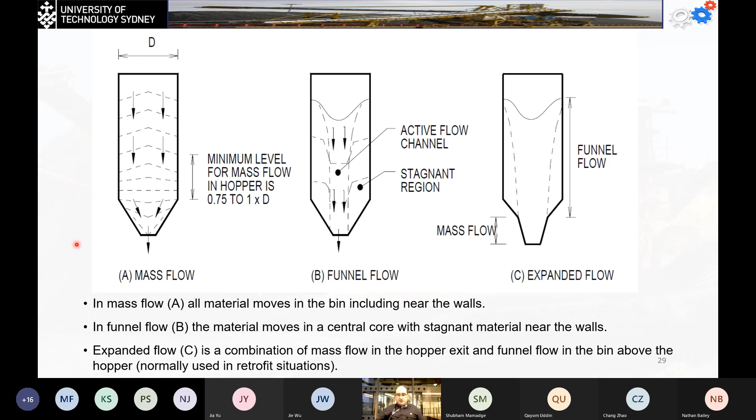The three cases shown more accurately look like this: we're not going to have plug flow with equal velocity. The materials move along the walls, and in funnel flow, the active movement is just in the center, and this causes what we call a rat hole.

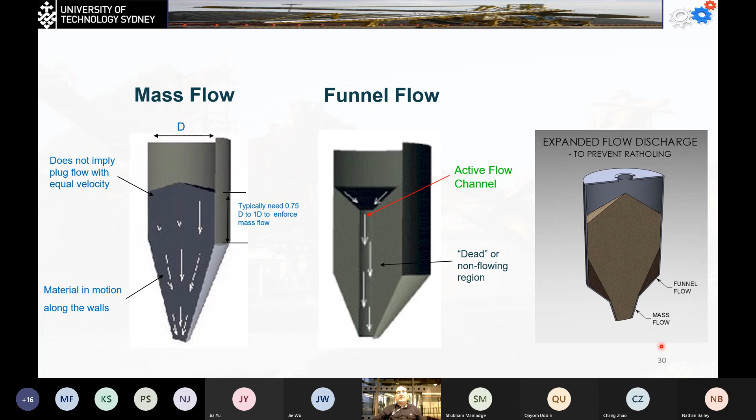We have non-flowing material on the sides; this can be due to build-up of material or high friction with the wall, making it static. Similarly, in expanded flow, the third flow, material on the sides doesn't move while in the center the material moves. This also causes many problems for your system.

Now, if you're going to work in a storage facility and they bring you coal, the first thing you'll do—you'll learn this by starting the work there—is go take samples, bring these samples to the lab, and start doing the tests for them.

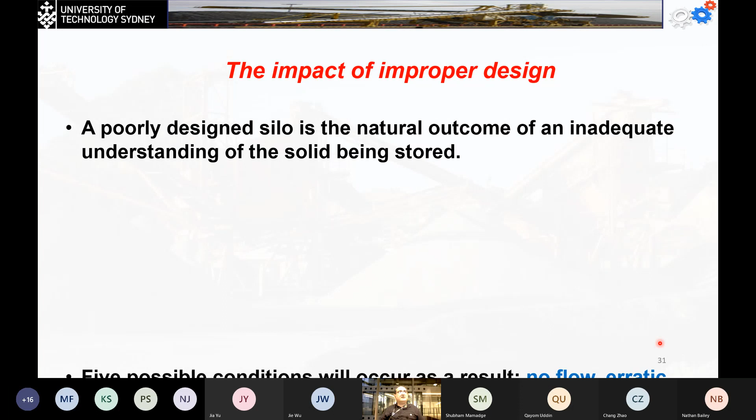You're going to have your own value for the delta and delta wall and do your calculation, and you're going to do that on the next day, third day, and the fourth day, until you have the appropriate cases for the materials, and you will know when you have to remove the materials from the silo. So 5 possible conditions can occur: no flow, erratic flow, flooding, counter current flow, and segregation as possible conditions from bad design.

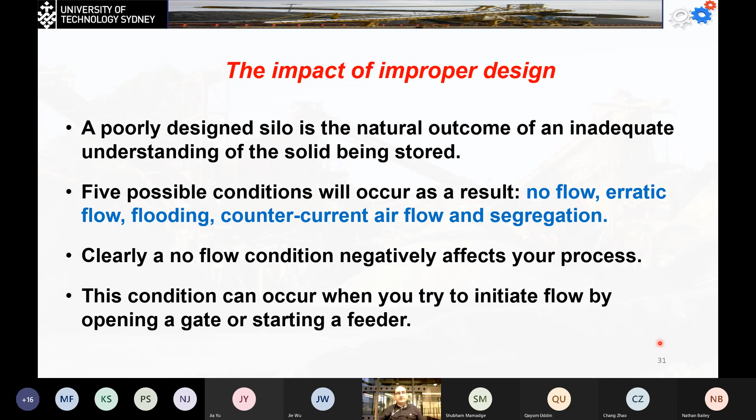Clearly, a no flow condition negatively affects your process. We're not going to have the correct amount of materials to feed the process. This condition can occur only when you try to initiate the flow by opening gates or starting the feeder. We said that the wrong flow can cause a problem.

Remember that this system, though built of stainless steel, the structure is always going to be weak. This system has been designed to take pressure from the inside, but it should be even. If this pressure is uneven, it's going to collapse very easily.

It's something like, if you fill a water bottle with pressurized water, it's going to hold the water inside. But if you have the water freeze inside the freezer, it's not going to expand equally. It's going to expand from one side more than the other, and this will cause the bottle to break immediately.

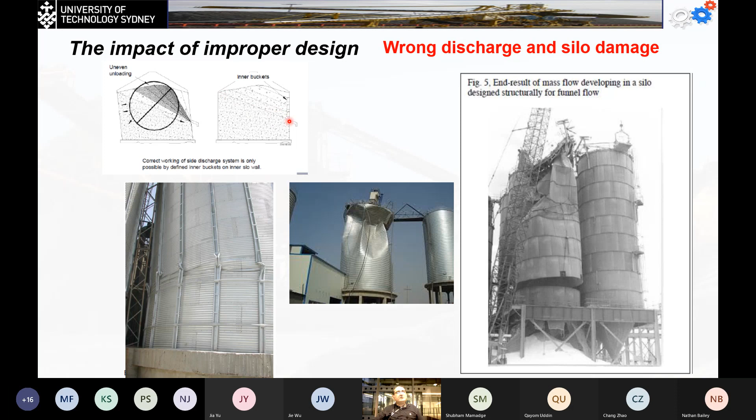This will be built in inside, and this will cause the system to be emptied in levels. So we're not going to have the case of uneven loading occurring immediately. You can see here the inner buckets are going to slow down the process of the flow, and thus the uneven load is going to be acceptable.

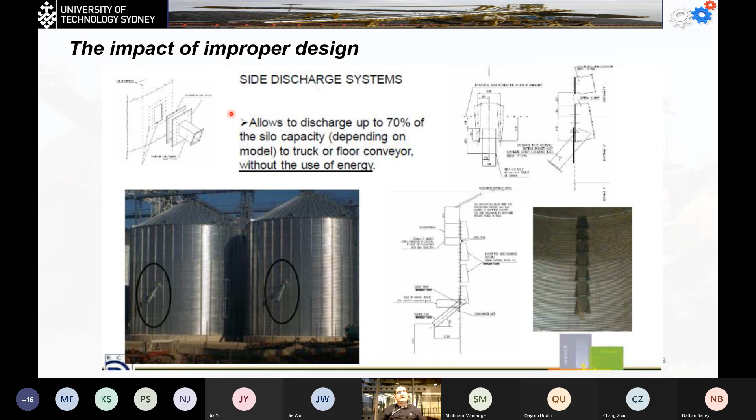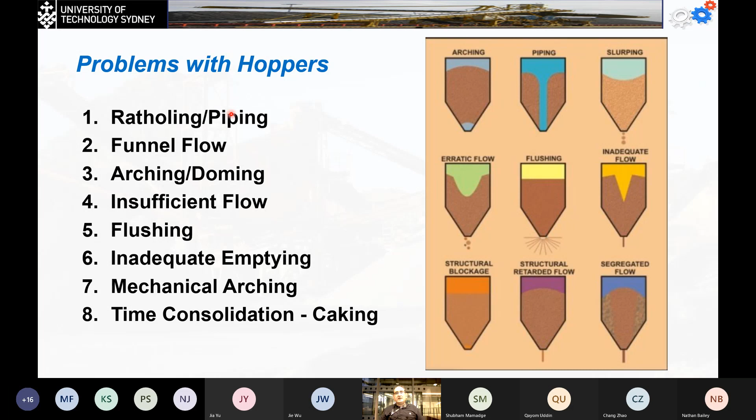Now, the problems we have with hoppers are ratholing or piping, the funnel flow, the arching or doming, insufficient flow, flushing, inadequate emptying, mechanical arching, and time consolidation or caking. In the next few slides before we take the break, we're going to look at each problem individually. We're starting with the ratholing.

So that's what you're going to see from the top. The material has built up. In the middle, all the material has free flow. So the ratholing or piping occurs when the core of the hopper discharges as in funnel flow, but the stagnant sides remain stable enough to stay in place without flowing. This leaves a hole down through the center of the solid stored in the bin, and this looks like a rat hole. So this will be the case where we have the void in the middle, and stable material regions around it.

The segregation process: in the segregation process, we're going to have the coarse material build up on the side due to its weight. Of course there's going to be something in the middle, but this is going to build up. When we open the hopper, the fine material in the middle is going to flow first.

The one on this side is going to have something like interlocking forces. When I say interlocking forces, that means they're holding each other, preventing flow. Also, some of the fine materials have filled the cavities between the coarse materials and then solidified, and this will cause the system to build up and not flow.

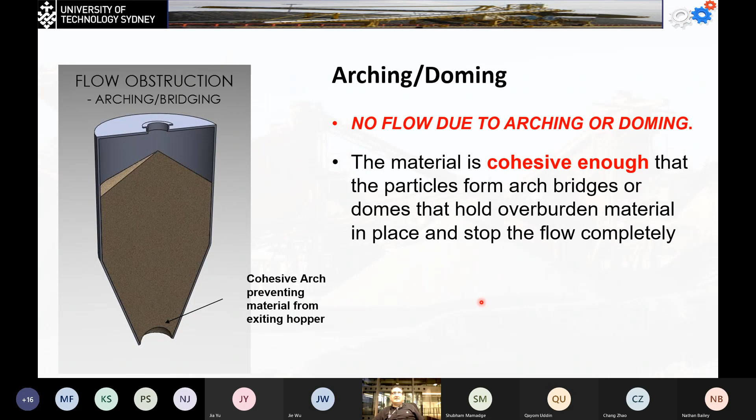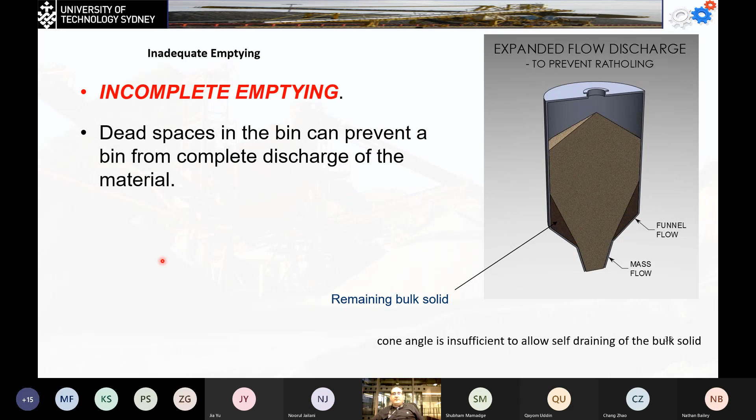We have incomplete emptying - once again, the material builds up in the edges and prevents the whole system from being emptied. We have the insufficient flow.

The material will flow continuously as a mass flow, but the problem is it will be very slow flowing out. So what's happening is that flow is too slow - the material does not exit from the hopper fast enough to feed the process. That's caused by, first, the outlet diameter may be too small for your material. Also, the material may not be sufficiently permeable to permit the dilations in the conical sections.

And thus, the material is going to flow in patches - like plops - until the whole system is empty. At least the system will eventually be empty, but it won't meet the requirements of your process at the end.

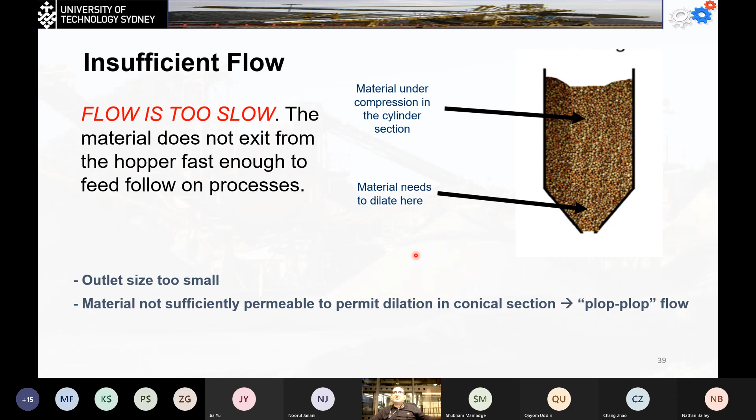Let's say the requirement of this process is just emptying the silo to fill a truck. So your calculation is to fill the truck with material within 30 minutes, but you end up taking 1 hour. Of course, the accumulated time for every truck will cause extra cost for your process.

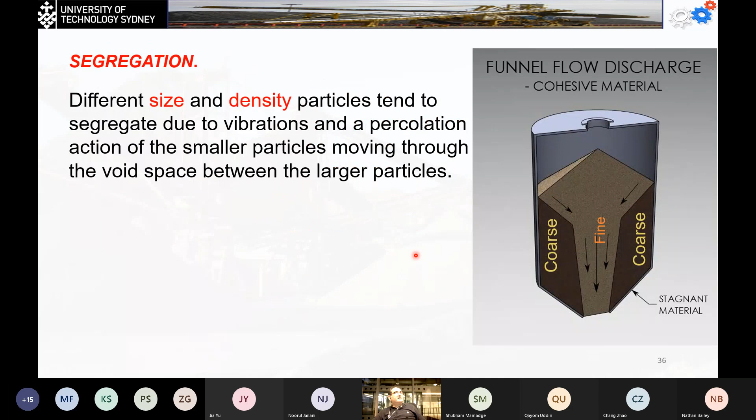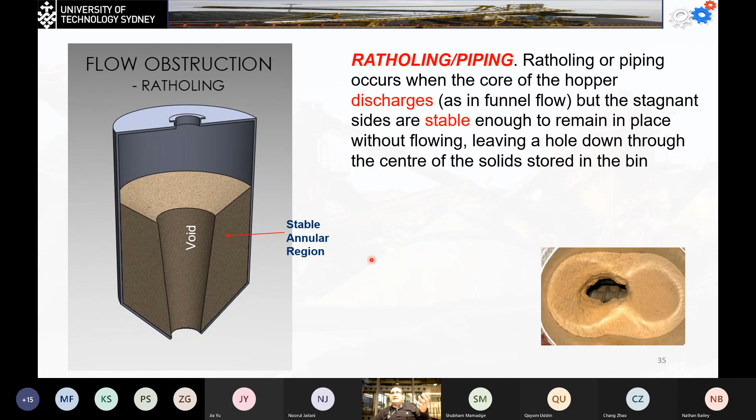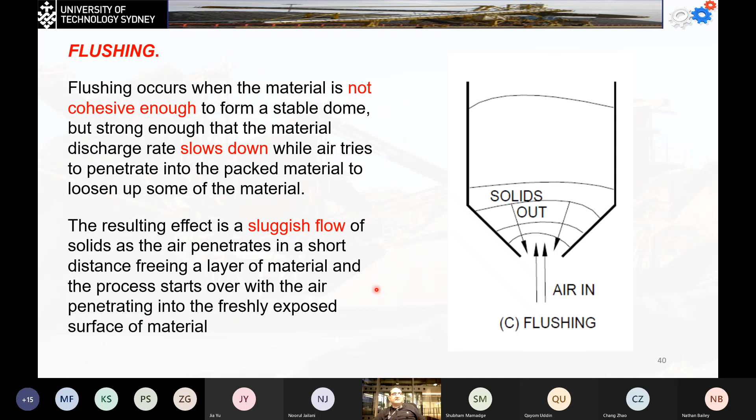Flushing occurs when the material is not cohesive enough to form a stable dome, but it's strong enough that the material discharge rate slows down while air tries to penetrate the packed materials to loosen some of it up. The result is a sluggish flow of solids as the air penetrates a short distance, freeing layers of material, with the air then penetrating the freshly exposed surface.

So once again, that's what's happening with flushing. The best process to get rid of flushing is using pressurization at the top. Usually this only happens if the material is light, so the air coming from the feeder pushes the material up instead of taking it down through the system.

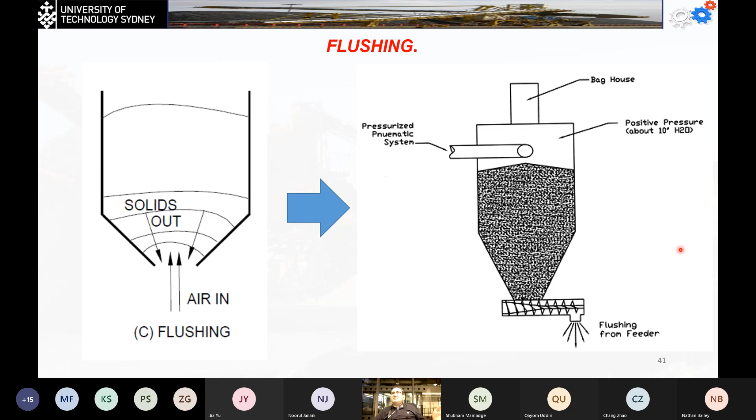So as I told you, the best solution for this process is simply sealing the whole system from the top, pressurizing the system with air, and this will push the materials to descend through the feeder to the process. An example for that can be, once again, the ash we talked about last week.

Now, mechanical arching, what we call the traffic jam, is when the materials start to build up and shape a plume shape. This usually happens at the outlet of the bin when too many large particles compete for the small outlet. That's what will happen. Usually this occurs unless the minimum outlet size is at least 6 times the diameter of the largest particle in the material.

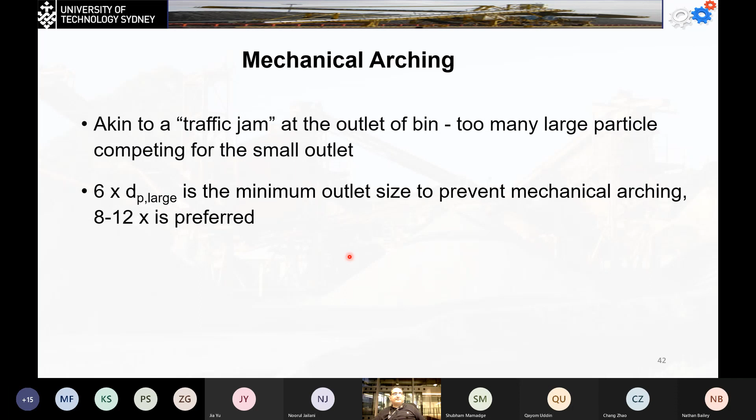Usually we don't do it like that. We always do the calculation to do it the right way.

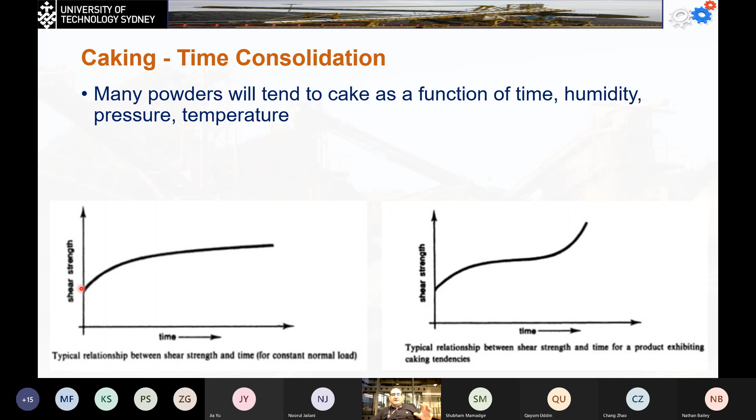Now the other thing we have is caking, or the time consolidation. Many powders will tend to cake as a function of time, humidity, pressure, and temperature. I actually had an example today and wanted to take some photos at home. I have protein powder stored in a container made of paper, well, a carton container. Due to the weather we have nowadays, today I tried to take some out, but it was actually caked. Over time, humidity went in, temperature was quite high, and the material became well defined. So once again, longer storage time means the material is going to build up, and thus it's harder to empty from the container. This is particularly a problem for funnel flow silos, which are infrequently emptied completely, and the outlet size is going to be smaller, meaning the system itself won't be useful for storage in the future.

Let's do another two papers, then we're going to have a break.

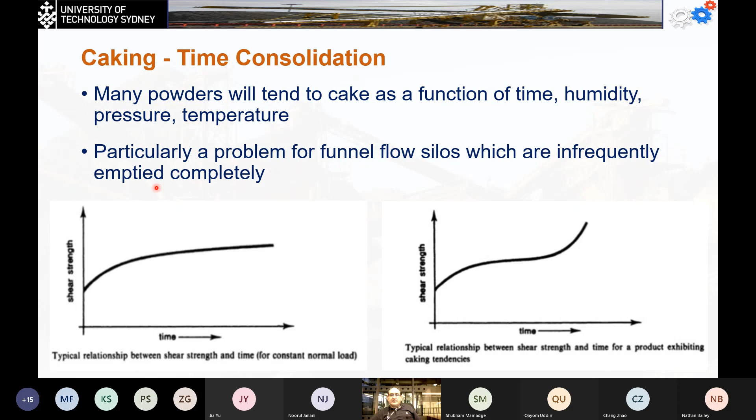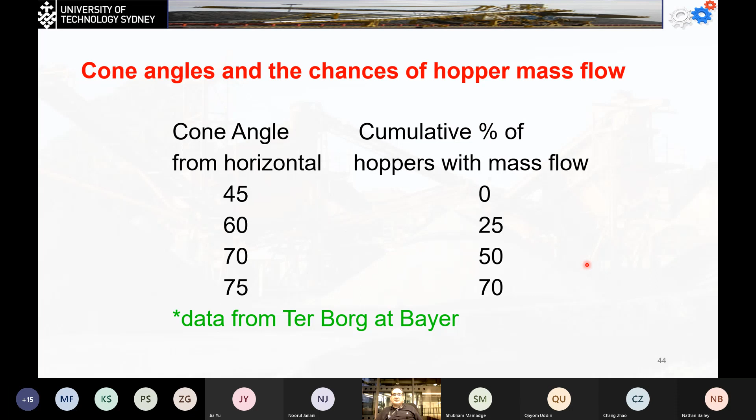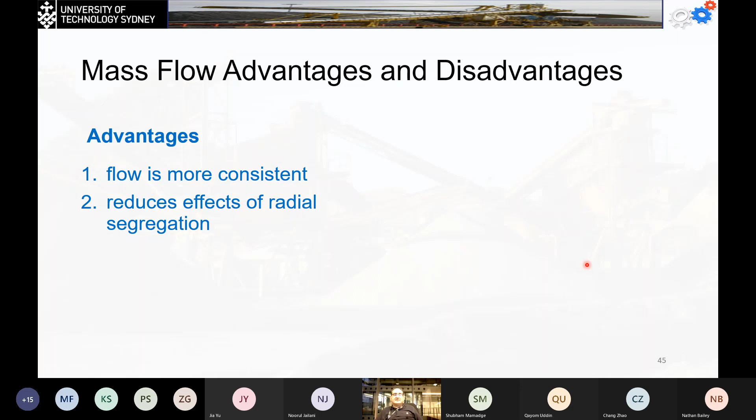So every type of mass flow has advantages and disadvantages. Flow advantages are, first, the flow is going to be more consistent. The effects of radial segregation and stress are more predictable, and we achieve full capacity utilization because it's emptied 100% and then filled 100%. Most importantly, first in is first out, because the level goes down from the top.

That means the material empties from the bottom. So the material at the bottom, which has been there for 3 weeks, is going to be emptied before the material which was added last week.

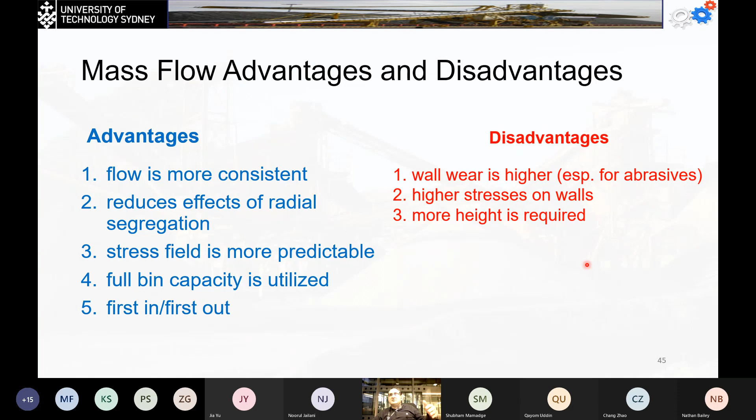Now for the disadvantages: wall wear is going to be higher because the flow is faster, and of course we're going to have higher friction, especially with abrasive material that can damage the wall. There are high stresses on the walls, and more height is required to achieve flow because we need to pressurize the material, and usually mass flow is a consequence of gravity.

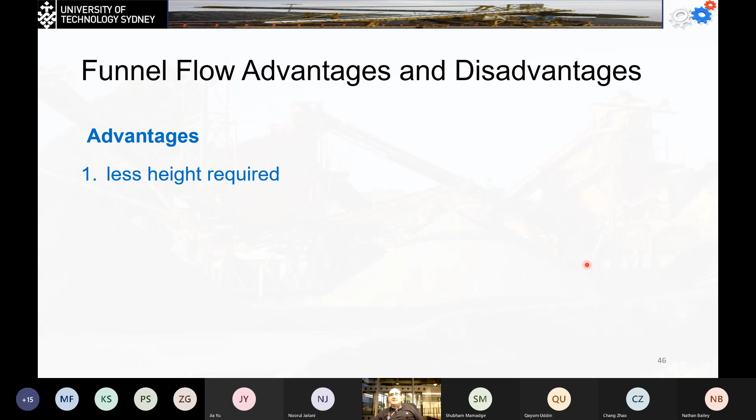Now for funnel flow advantages and disadvantages: the only advantage is that less height is required. But the disadvantages are rat holing problems with the solids. First in will be the last out. Time consolidation effects can be severe on the system. The silo may collapse, and we may have flooding, and a reduction in the effective storage capacity.